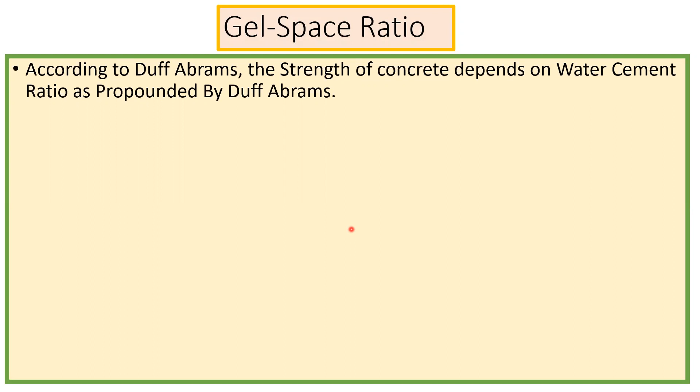But there are a few limitations to this water cement ratio law, and a few researchers way back in the 1920s and 30s argued that whatever law Abrams has given for water cement ratio can only be called a rule and not a law, right? All these years we have been understanding that whatever law he has given is good.

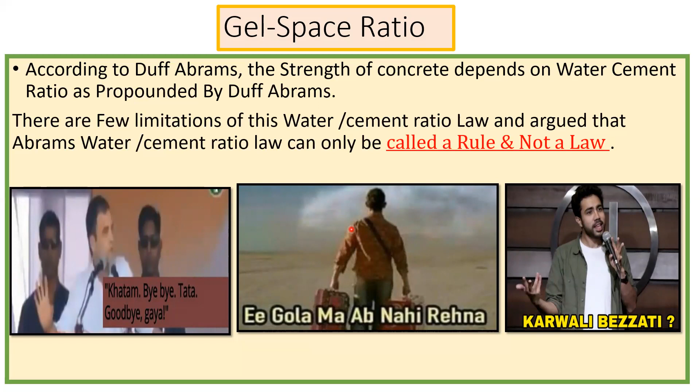But now two or three different researchers have finally come to a conclusion that whatever he's telling is not correct, and there are a lot of other factors on which the strength of the concrete actually depends. So when they are telling this, there should be some reason behind it. So what are the factors that actually affect the strength of the concrete?

They stated that the strength at any water cement ratio depends on the degree of hydration of the cement, its chemical and also physical properties. This is the first thing they are telling. They also say it depends on the temperature at which the hydration takes place, and on the air content in the case of air entrained concretes.

We'll see in chapter 5 what air entrained concrete is. There also the air content matters, and also the change in the effective water cement ratio and the formation of fissures and cracks due to bleeding or shrinkage. It also depends on the extent of cracking, on the shrinkage, and a lot of other factors that affect the strength.

So Duff Abrams talked only about water cement ratio, but these people have given four other points and said it all depends on these. That is why they say whatever he has given can be a rule. Water cement ratio is one rule, but you cannot say it is a law, right? Now, since these people have stated these factors, they have to validate them. They cannot simply state that.

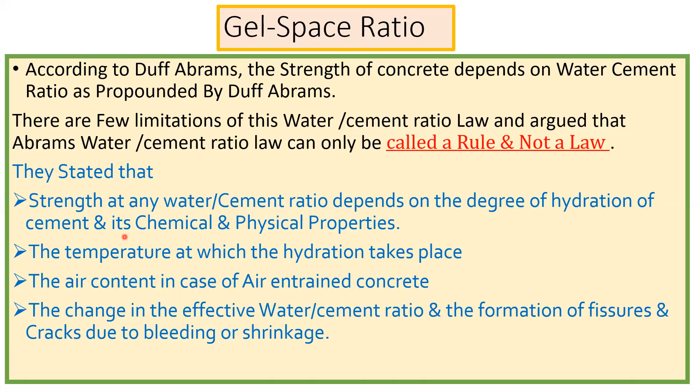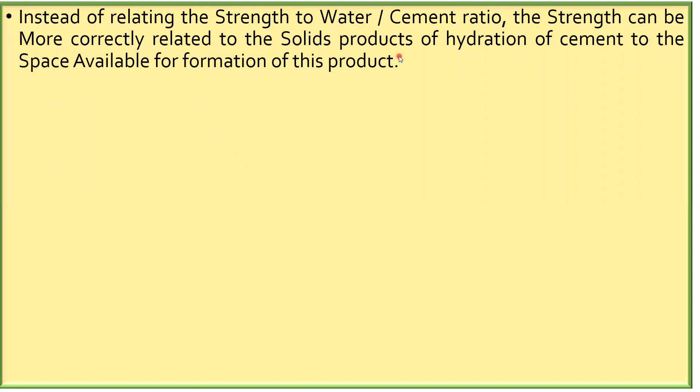So they said that instead of relating the strength to water cement ratio, the strength can be more correctly related to the solid products of hydration of the cement relative to the space available for the formation of this product, right? So who are those persons? Powers and Brownyard established a relationship between the strength and the gel space ratio.

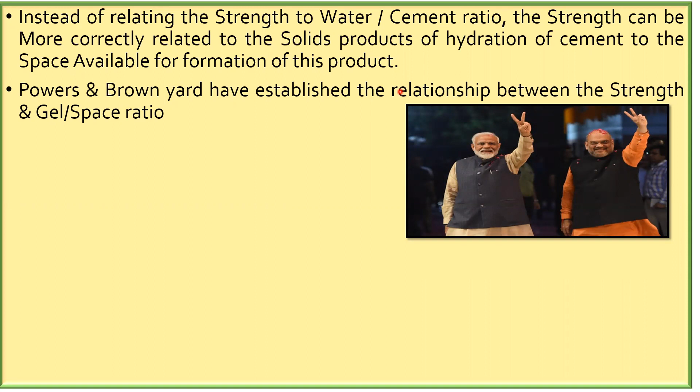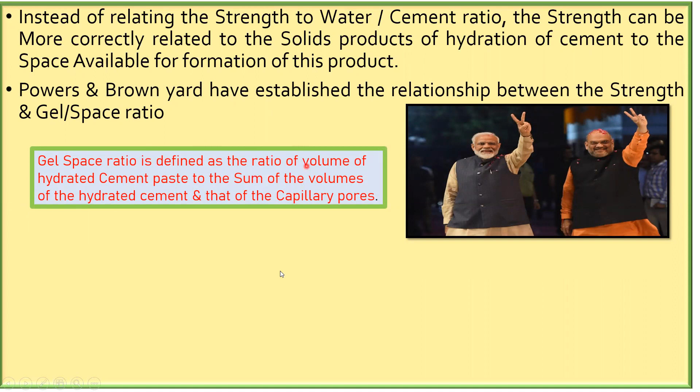Gel space ratio is defined as the ratio of the volume of hydrated cement paste to the sum of the volume of hydrated cement and that of capillary pores. The formula they have given is S = 240 x³, the theoretical strength of the concrete, and this is an empirical formula, where S is the strength of concrete, x is the gel space ratio, and 240 is the intrinsic strength of the gel in N/mm². With this, we'll find the theoretical strength of the concrete.

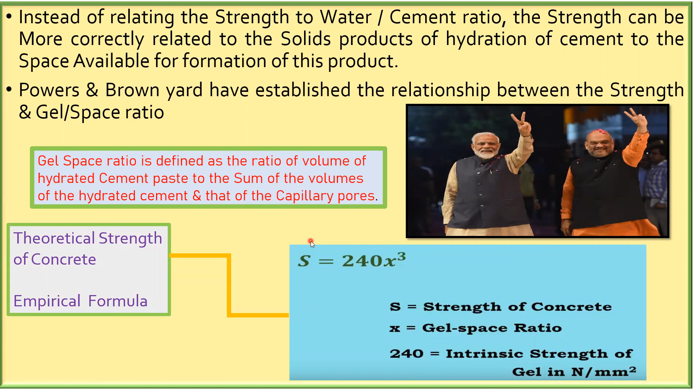Along with that, they have given another two formulas. For complete hydration, the gel space ratio is equal to volume of gel divided by space available, which will be 0.657 C upon (0.319 C + W₀).

Next is the gel space ratio for partial hydration, which is equal to volume of gel divided by space available, with this formula: here we have C and alpha, and 0.319 C alpha plus W₀ in the denominator, right? Now we'll take up one problem on this and solve it.

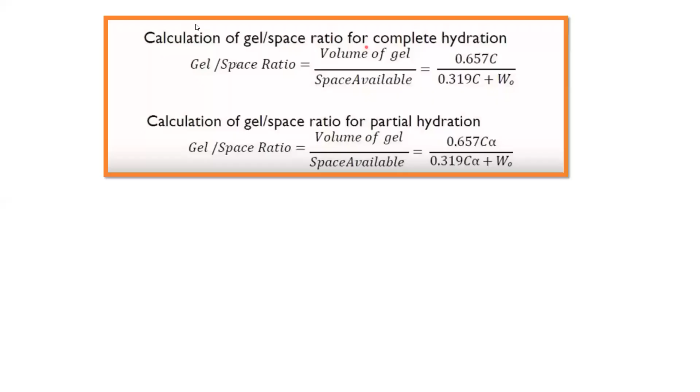Yeah, so we'll take this as an example. So it's written: calculate the gel space ratio and the theoretical strength of a sample of concrete made with 500 gram of cement with 0.5 water cement ratio, on full hydration and at 60% hydration. So first for full hydration, we'll try to do it. We'll do it this way.

So for full hydration, what is the formula given? Full in the sense complete hydration. So this is the formula I have: 0.657 C upon 0.319 C plus W naught, right? Now what is C? C is the weight of cement in gram, and W naught is the volume of mixing water in ml, right?

Let me write it here. C is the weight of cement in gram, and W naught is the volume of mixing water in ml, right? So how do we approach after this? How do you get this answer? We'll try to do this as well.

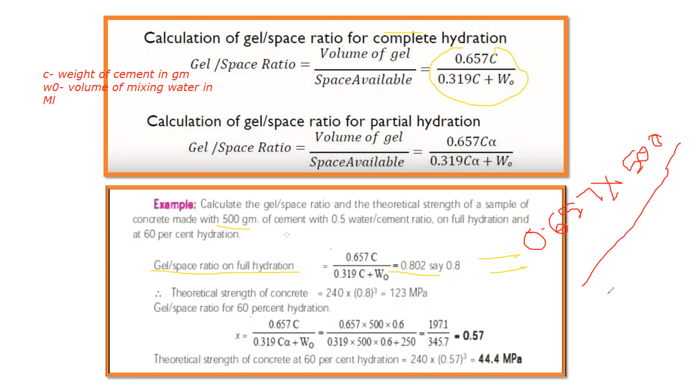So this is equal to 0.657, it's a constant, into C. C is the weight of cement in gram. So what is given here? 500 is given. So 0.657 into 500, divided by 0.319 into C. C is again 500 for us, weight of cement in gram, plus W naught. So W naught, water is not given, right?

But we know the water cement ratio, I'll write it here, water cement ratio is equal to 0.5. Now we know water cement ratio, we know cement content. If I cross multiply these two, I'm going to get the water content. So 0.5 into cement content, 500 gram, and whatever you get will be in ml. 0.5 into 500 comes out to be 250 ml. Now plus 250 is what you need to do.

I'll repeat it again so that it becomes clear. What you need to do is 0.657 multiplied by 500, because that is the weight of cement given. You divide it by 0.319 into C. C is again 500 for us, weight of cement, plus W naught. W naught is not straight away given, but we know the water cement ratio is given and cement is known. Ratio 0.5 into cement content 500 gram gives 250 ml. So that is the water. You add 250 there, right?

And if you do this calculation, you end up getting 0.802 manually. Here also I'm getting 0.802. You can say it as 0.8. Now the theoretical strength of the concrete: we have seen from the previous slide that it's given as 240 into x cube, right? And x stands for this ratio. So x here is 0.8. So 240 into 0.8 whole cube. If you do that, you're getting 123 megapascal as the theoretical strength of this concrete, right?

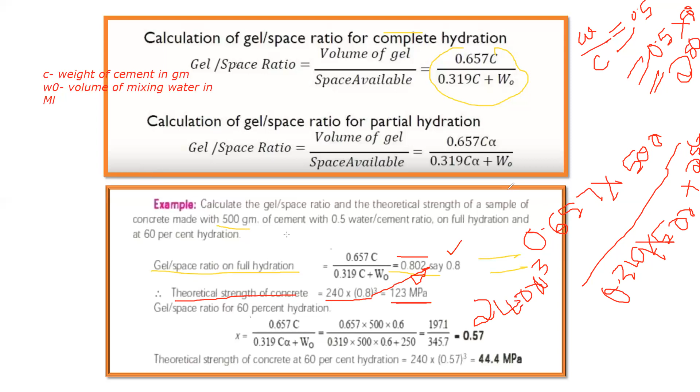Now similarly, try to do it for the partial hydration. That is, 60% is partial hydration. The formula is given here for partial hydration. Only thing is, there's a small mistake here. Make it as alpha. Alpha is missing here. So again, 0.657 into C, cement content 500 gram, into alpha. This comes out to be 0.6. Why 0.6? Because 60% is the hydration given, so alpha is 60%.

Then you divide it by 0.319 into cement, again 500 gram, into 0.6, because 60% is given. If 70 was given, we would have taken 0.7 here. If 80, 0.8 we would have taken. Plus 250, which we know from the previous calculation, that is W naught, since water cement ratio is 0.5, right? Do this calculation, you get 0.57. Now to find the theoretical strength of the concrete at 60%, we do 240 into x cube, where x is 0.57. We are getting 44.4 megapascal, right?

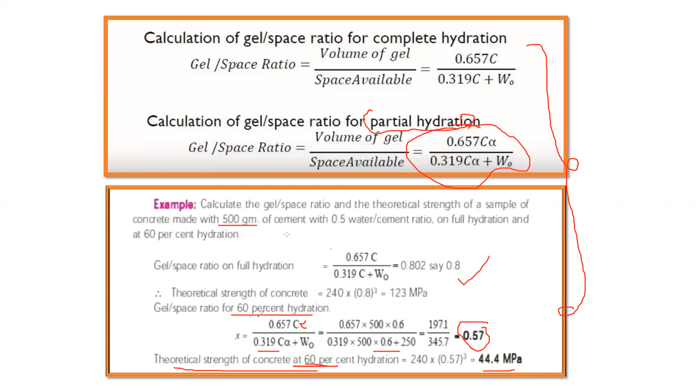So in this way we need to do the calculation, and based on that we can say this is the strength of this particular concrete at so and so hydration. If it is full hydration, this is what we get. Partial hydration depends on what percentage they are asking us. I hope these things are clear. You got an idea what gel space ratio is and how it has to be understood.